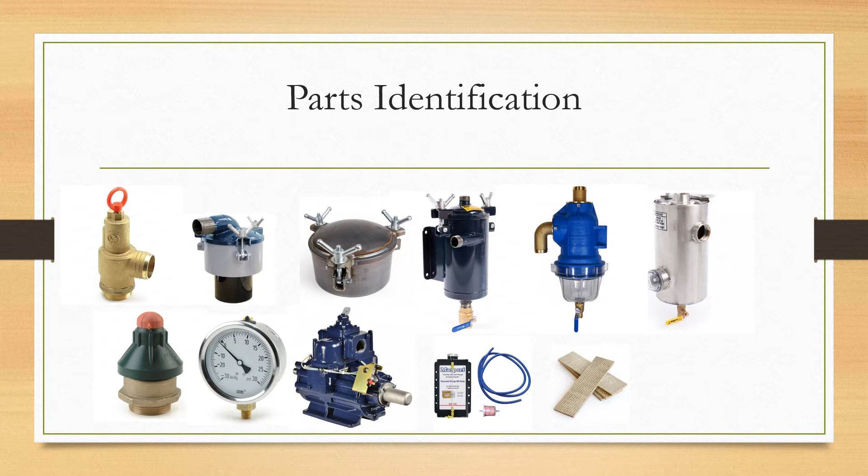In this presentation, I'm going to be talking about the parts and components involved in making a vacuum system function, what each component does specifically, and how to maintain it and how to choose the correct part.

So I'm going to start off with the vacuum pump. I'm going to be real brief on it because that's an hour-long video in and of itself. What you need to know is the only job it has is to move air. It doesn't move waste, it doesn't move any water through the system. The cleaner the air, the better.

The key takeaways on how it works is it uses Kevlar vanes. This specifically is a Masport pump, but all rotary vane pumps use Kevlar vanes, and they expand at the bottom, they collapse at the top. So as it rotates, it creates an air pocket. It sucks air in, and as they squeeze again, it pushes air out.

We're going to be talking about how to keep this clean, because that's what longevity means for this pump - just keeping it clean. The cleaner you can keep it, the longer it's going to last. So we want those vanes to just keep extending and retracting. That's what we're going to be discussing today.

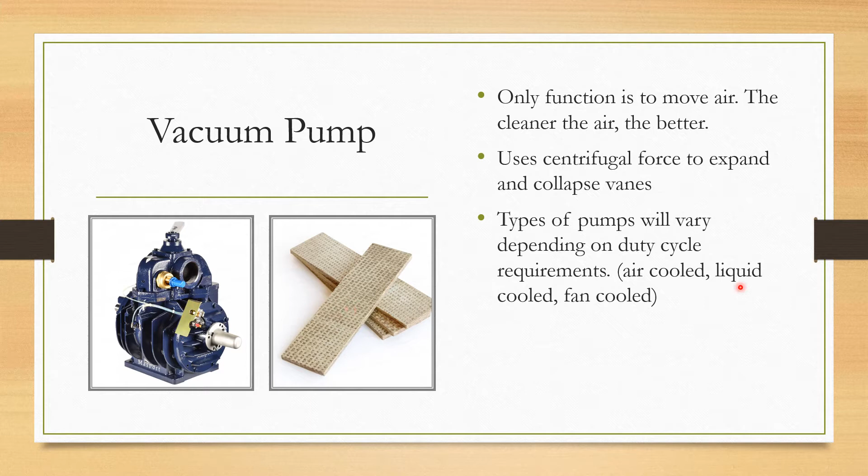The first on the list at the very top of your tank is the primary filter, commonly called a primary shutoff, and that's because it's actually not much of a filter at all. Its job is to stop water from getting into your system in the event of an overflow or wastewater or what have you. How it works is air will be flowing through, and if waste levels get too high, this ball is going to float up into that rubber stop, and it's going to stop the airflow and deadhead your pump.

In this case, deadheading your pump is okay because you don't want sewage to go through the whole system. It got brought up in Reno - well, how do you service this thing? It's not as much of a service as it is you're just checking on things and making sure it's still there. Yes, you'll get some debris inside there that might restrict a little bit of airflow, things like toilet paper or leaves or whatever.

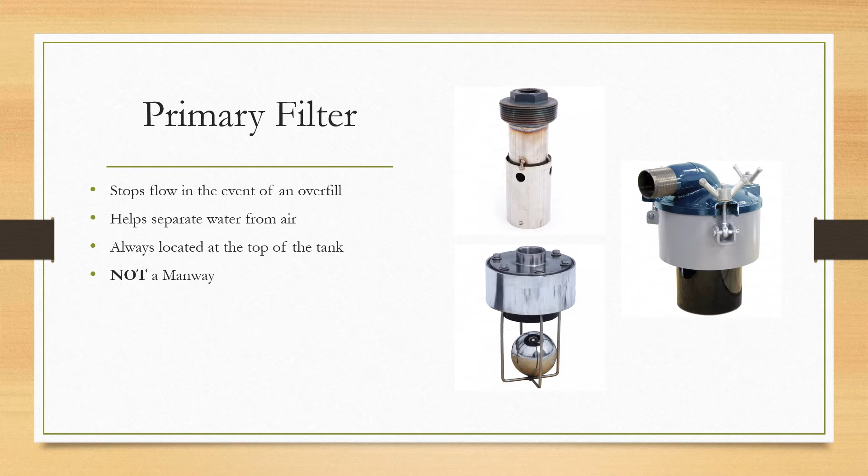But you want to check it because this one's steel, and even if they're aluminum, a lot of times this stuff will rot completely away due to rust and corrosion. And then in that case, you're left with just a manway - nothing more than a manway, because the ball mechanism, the shutoff mechanism, is destroyed. You're also going to want to try and paint these. Painting it will help prevent or at least slow down the corrosion and rust, and it'll keep it alive longer. So check on that every once in a while.

Next up is the secondary filter. It comes in a vast variety of shapes, sizes, CFM ratings, and materials, but they all do the same job. The job is to separate the water from the air. It does this by pulling air in, running it through a series of baffles and tubes, and then pulling it back out, allowing it to separate that water from the air. Again, we're just trying to protect that vacuum pump.

The bigger it is, in almost all cases, the better, just because it has more time to work - more time to separate that water from the air, and it'll really do a better job. Depending on the CFM rating, it's going to get bigger and bigger, and that's because the faster the air is moving, the less time it has to separate the water from the air. You'll see, in this case, this is a 1-inch primary shutoff with a ball inside of it, not much CFM, so it has a lot longer time.

Versus if you put that HXL 400 on there that we just saw, first of all, it's going to restrict the airflow a lot. So even though the vacuum pump is rated for that CFM, you're not going to get that because this is a major obstruction. It's also not going to do its job at all because it's moving so fast. It's going in one side, out straight through the other. It's not having time to work through the bottom.

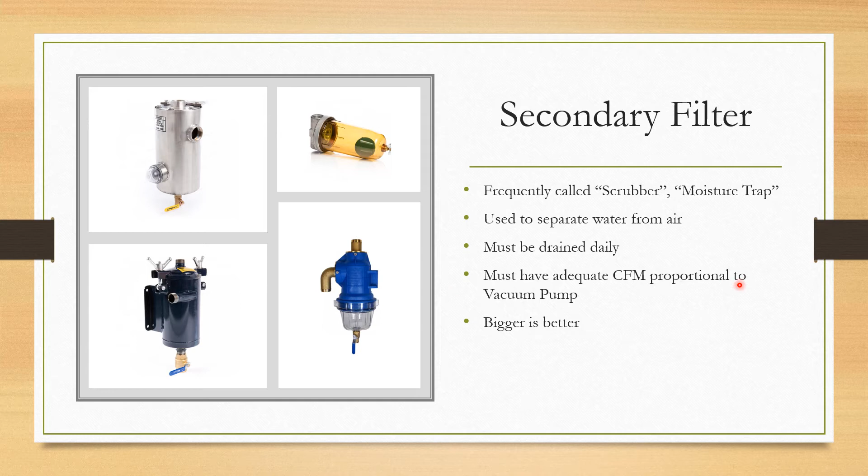But yeah, CFM rating. Make sure you check that with the manufacturer or us when you call, and we'll make sure we get it right.

This is the final filter, or the inlet filter, and the way to think about this filter is to think about it as the air filter on your car. So its job is to filter out the fine stuff, not water, but debris. So like chunks of rust, toilet paper, leaves again. It'll separate that, and there'll be a canister. A lot of times, especially nowadays, it's usually located on the head of the pump, the intake manifold of the pump, or anywhere between the secondary and the vacuum pump.

So these need to be serviced and checked.

This is an actual picture that a customer had sent to me. He wasn't getting any vacuum in his system. The tank was empty. The secondary was drained. Oil catch was drained. He flushed the pump. Still no vacuum. All right, send me a picture of your pump. Send me a picture of the whole system.

Well, I noticed that there's this final filter there, and a lot of trucks don't have this. This one wasn't located on the vacuum pump, but it was along the chain.

So he opens that up. This is the picture that I got. As you can see, this is covered with rust, dirt, dust, all sorts of stuff. And it was a major restriction in his vacuum system. So he wasn't able to build any vacuum in his tank.

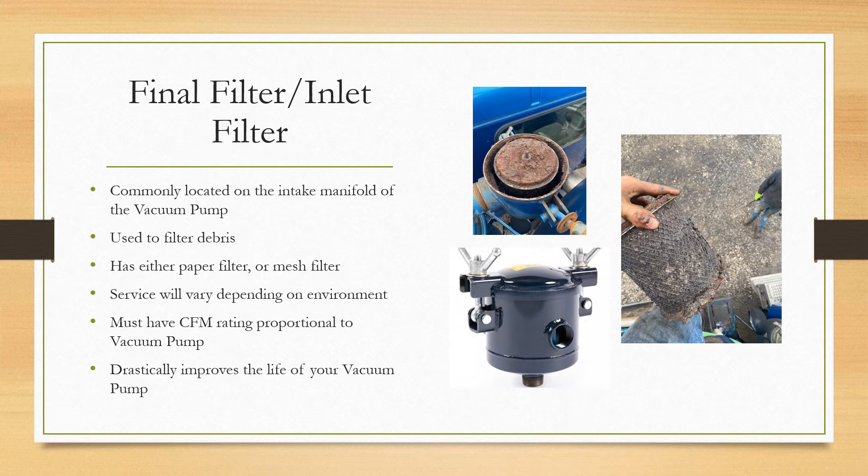But this is something that needs to be serviced a lot. Again, with the CFM rating, it needs to be adequate for your vacuum pump. This will drastically improve the life of your vacuum pump, guys. This is the difference between a 5-year pump and a 20-year pump. They're relatively cheap considering the price of a vacuum pump, or even a rebuild kit for that matter. Definitely worth having.

Next is your oil catch muffler. So your oil catch muffler is located after your vacuum pump, and its job is similar to the secondary, except rather than separating air from water, it's separating oil from air. And there's not much to these.

This is where you're going to notice if the CFM rating is adequate, because if it's not going to have time to work that oil, you're going to get a huge bath of oil right down the side of your truck. You'll fire up your vacuum pump, turn it in vacuum, and it'll blast oil all down the side of your truck. It'll make a big mess. And if it doesn't, it's going to restrict your vacuum pump, and you're going to build up a lot of heat, which in turn is going to shorten the life of your vacuum pump, and you won't create as much vacuum because of that heat buildup.

So you want to make sure that that's big. You want to drain it daily.

And another thing, it's pretty common for people that build their own trucks, and I've even seen manufacturers build trucks, and you'll have your vacuum pump here, and your oil catch will be way up here because it's easy to reach a handle to drain it. Well, that's not necessarily a good idea because as oil's heavy, as I'm sure most of you know, as your vacuum pump's spitting out that oil, it has to travel up all that plumbing and then go to the oil catch.

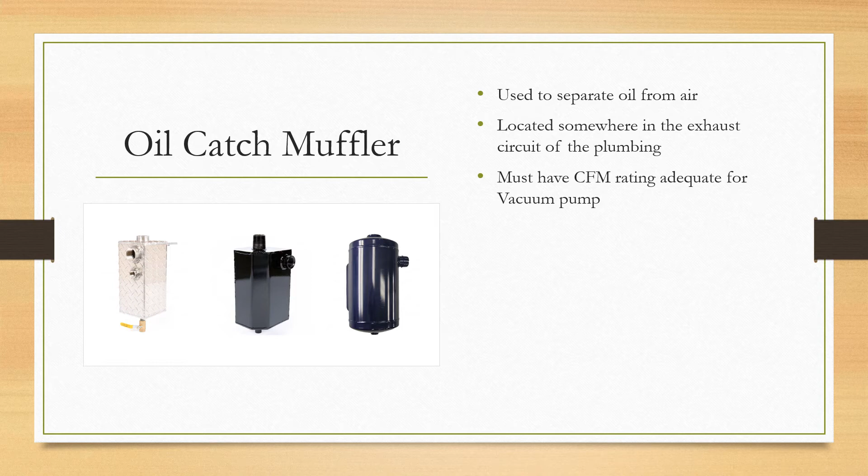So now let's talk about vacuum and understanding vacuum. Obviously, vacuum is the absence of air. Here's how I want you to think of vacuum—you have to think of pressure.

You can always put more air inside your tank until it explodes. You can put 100 psi in there, or 1,000 psi, or even a million psi, if it would hold it. However, with vacuum, you can't take out what's already gone. You can't take out more air than there is air—you can only take out so much. So it's limited, and your maximum vacuum is going to depend on your elevation.

At sea level, most vacuum pumps will get anywhere from 22 to 24 inches of mercury. That range comes down to heat buildup—that's a continuous vacuum rating. The 22 inches of mercury is going to come from your air-cooled pumps. These are pumps without a fan or without coolant running through them, and they get hot, so that's going to limit your vacuum.

Rule of thumb: about every 1,000 feet you go up, you're going to lose an inch of mercury. Atmospheric conditions can also affect how much vacuum you have, so keep that in mind.

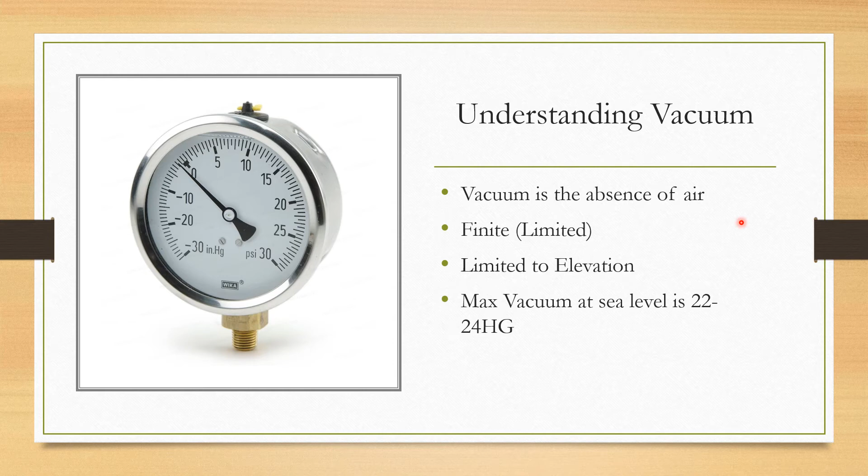So let's talk about how to choose the correct vacuum pump. As I briefly discussed earlier, you're going to need to know what your vacuum pump's going to be doing, whether it's septic or portable toilet work, and what the duty cycle is going to be. Are we pumping toilets, where we might run it for 10 or 20 minutes? Or are we pumping septic tanks, where if it's a big tank and you've got to connect a lot of hose, it could be running for 30, 45 minutes? I've seen cases where it's 3 hours if there's a lot of head in the hose.

And the size of hose is going to play a role too. So with septic trucks and grease trap pumps, you're going to want a liquid-cooled or fan-cooled vacuum pump to help keep it cool, and it's also going to give you that extra couple inches of mercury we discussed earlier. It just does a better job, and your pump will last a lot longer if it can shed that heat. It's more expensive up front, but you're really saving money down the line because you won't have to mess with it.

So the formula, in order to attain full vacuum in 30 seconds, is the gallonage of the tank divided by 7.5, and that gives you how many CFMs—cubic feet per minute—your tank will require to achieve full vacuum in 30 seconds, because there are a lot of different options.

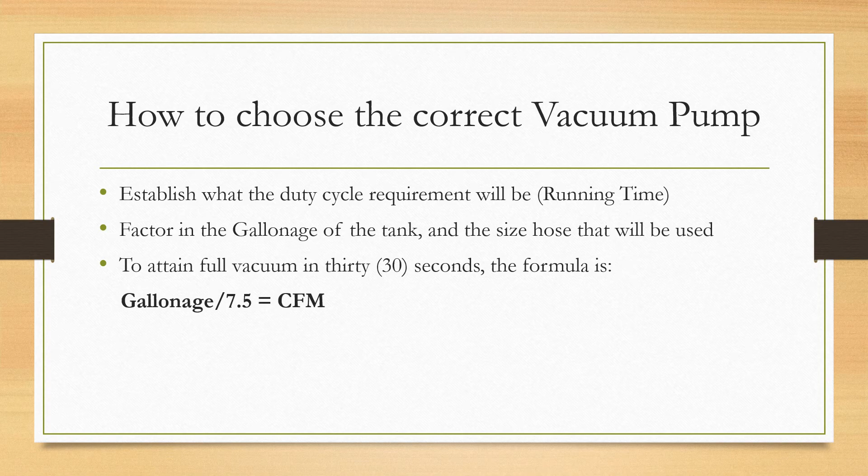Now let's talk about how to adjust the vacuum relief valve. As we discussed earlier, it's going to depend on your elevation. There's certain charts that I can email over to you if you're interested. Just give me a call and I'll be happy to walk you through it and give you the technical way. But the easy way to do it is hold up your vacuum relief valve and see what its maximum vacuum is, and your atmosphere, your elevation. Just see what that vacuum pump can do. It's not going to hurt it to deadhead for a couple seconds.

So let's say I'm able to pull 18 inches of vacuum in Utah. From that point, I'm going to adjust my vacuum relief valve to 17 inches, and that just ensures that it breathes. You need a vacuum relief valve because if there's no air flowing through that pump, it's called deadheading. When you deadhead a pump, everything's moving around there, everything's working hard, but there's no way to cool it because nothing's moving. So it's just going to build and build and build heat, and that's going to take out your vacuum pump. That'll drastically reduce the life of your vacuum pump and your vanes, bearings, everything. So you want to make sure air's flowing.

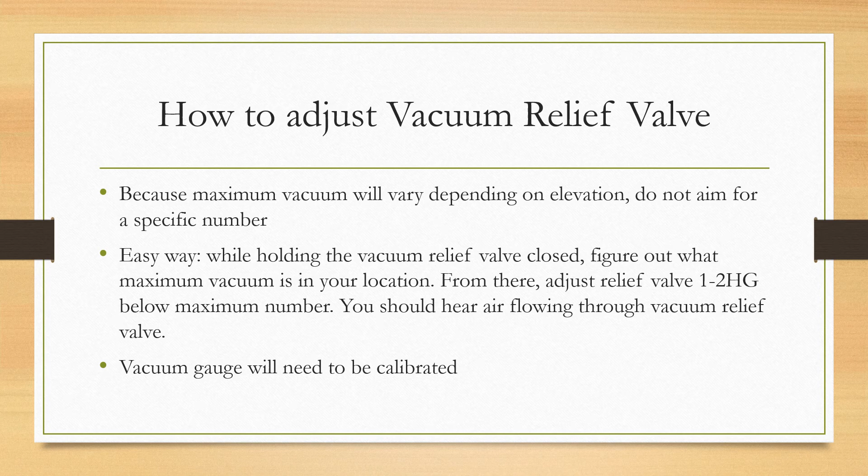Pressure relief valves. Even if your truck has a vacuum only pump, your service truck will still need to be equipped with a pressure relief valve.

And here's why. We have a local customer, and what happened was at some point in the day he had pumped out a car wash, and then he went and serviced a donut factory, and somewhere in the mix there were two chemicals in there that did not get along. So he didn't drain the truck, parked it overnight, and that chemical reaction took place and built so much pressure that it spewed up some foam that clogged up his vacuum pump, and he didn't have a pressure relief valve. Well, that tank exploded. So that's why it's important to always have a vacuum or a pressure relief valve.

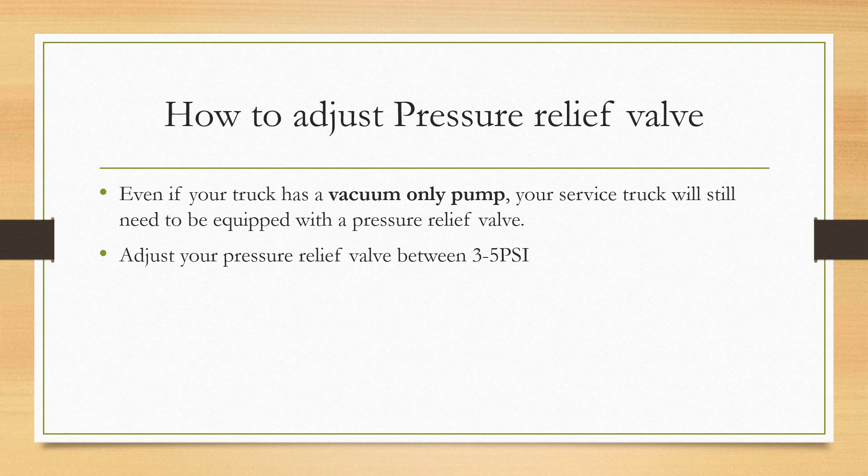Just in case something crazy like that happens, it's just necessary to have. Just set your pressure relief valve between 3 to 5 psi, really doesn't take much to get the job done. And those tanks, if you overpressure them, you're essentially creating a bomb. They're built to withstand vacuum, not pressure.

All right, so now we'll talk about flushing your vacuum pump. This is how you clear debris and stuff out of your vanes, and it definitely improves the longevity. It'll get rid of some of that sludge that we talked about. You'll be able to kind of restore your vacuum pump if it seems to be wimping out, not how it used to be running. This is going to help a lot. And in a lot of cases too, if you have a vane that's stuck, if there was something that got in your vacuum pump that shouldn't have been in there, sludge, whatever, it'll help free your vanes.

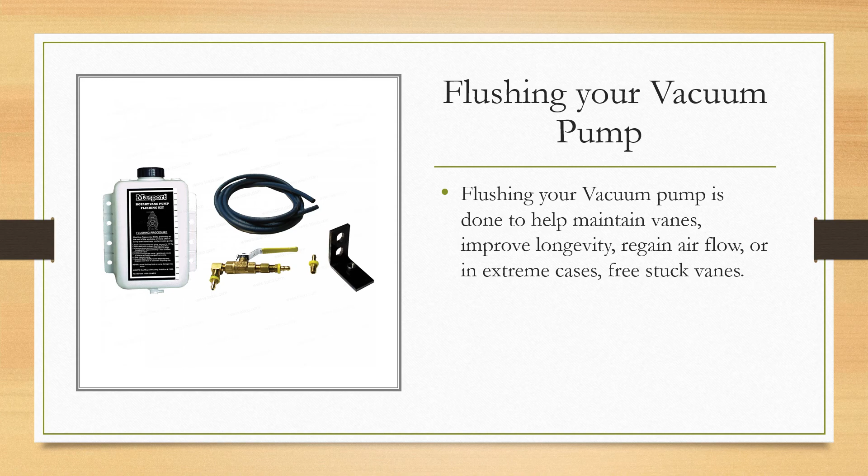So how to flush your vacuum pump - I'll go more in depth on this later in another video, because this is kind of a drawn out process depending on what vacuum pump you have. But the easy way to do it is disconnect your inlet hose if it's not already equipped with a flushing kit, mix a 50-50 ratio of the pump oil you're using and diesel fuel, and feed it in about a quarter pint to half a pint at a time, and let that work.

Let that work through your vacuum pump, and make sure your oil catch is drained, or else it's going to spew everywhere. Just let it work. Bigger vacuum pumps, you can even do half pint increments.

Something important to note: when you're doing that, it's an easy process, but don't let those vanes sit. Don't dump that in your vacuum pump and then shut it off. What that'll do is, if your vanes are sitting in fluid, they're going to absorb your pump oil and that diesel fuel, and those vanes are going to swell, which will make them get stuck inside that rotor. So it'll spin, they'll collapse because they have to, but they're not going to expand, and they'll become stuck.

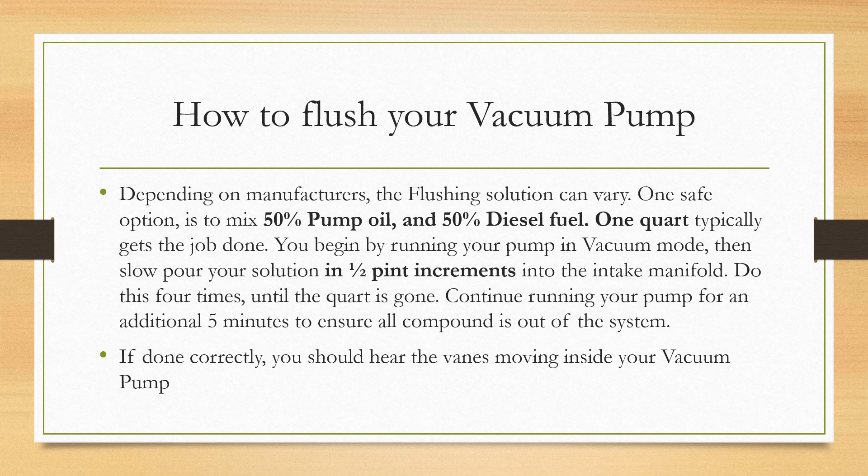When you do this right, when you shut off your vacuum pump, you're going to hear a lot of chattering, like tick, tick, tick, tick, tick, and that just means you did the job good. That's exactly what your pump is supposed to do, because what you're hearing is those vanes releasing and bouncing into the cylinder, and that's perfectly normal, perfectly fine.

Rebuilding your vacuum pump - I'm not going to be too elaborate on this because it's such an in-depth process and there's a lot to know about it. Here's what I'll say: make sure you read the owner's manual, and make sure you understand the process, the tolerances, the measurements, and where everything needs to be.

The biggest thing I'd say, because if you put everything back together the way it was and all you did was clean it out and give it new vanes and bearings maybe, make sure you're using brass tooling. You're doing this because some of the clearances inside that vacuum pump might only be a couple thousandths of an inch. So if you hit it with a steel hammer and make a ding or a nick anywhere, it's not going to fit back together correctly. You're going to lose vacuum, or damage your pump, and it could be rendered useless if you put big dings and nicks in there.

So use brass tooling. Also, this is a photo a customer sent me, and these lines you're seeing here are actually grooves. So use your eyes and make sure everything feels smooth - that cylinder should be smooth. Because of those grooves, the vanes aren't going to be able to rest securely against that cylinder wall, so you're not going to get a good seal, which is how a vacuum pump works.

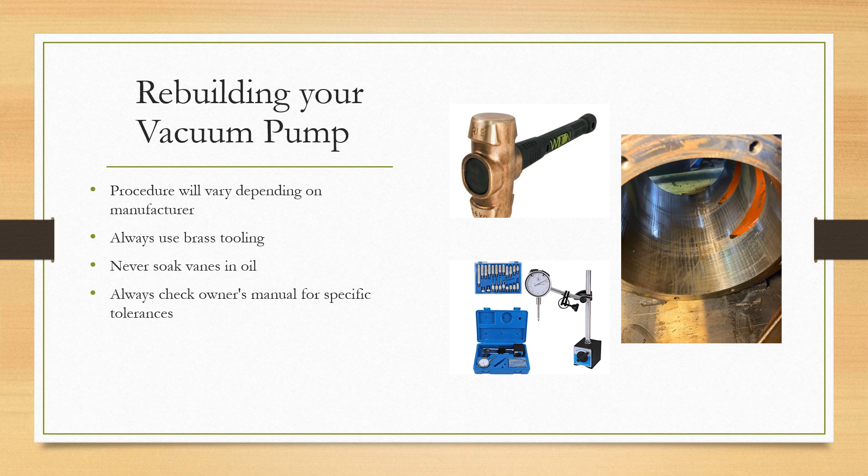This is common, it happens with a lot of them - there's a lot of grooves and ruts. A lot of times you'll see ruts going this way, and that's just air that's going to be able to escape, so your vacuum will start dying off. Sometimes you can take it to a machine shop and they can bore that and it'll be good as new. Other times they can't. So that's just something to keep in mind and pay attention to.